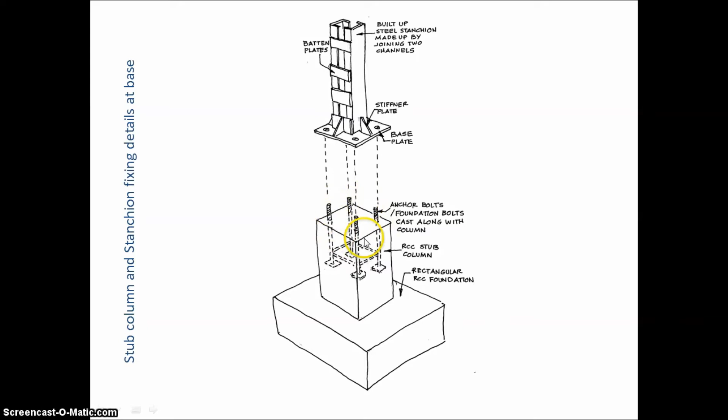Now once this is done, the steel column is fabricated or manufactured outside. This stub column and foundation has already been cast. The steel column which has been fabricated outside is lifted up with the help of a crane, and then it is slowly lowered down onto the pedestal in such a way that the holes exactly correspond to the foundation bolts in the stub column. So you will see that the bolts go through these holes and the steel column gets fixed on to the stub column.

Let us go to the next slide and see a position where the steel column has now been fixed to this stub column. What you are seeing here is the RCC stub column. You are seeing the anchor bolts with the small plate at the bottom. You are also seeing the base plate of the steel stanchion and the stiffener plates. The bolts have gone through the base plate, and the steel column is now fixed onto the pedestal.

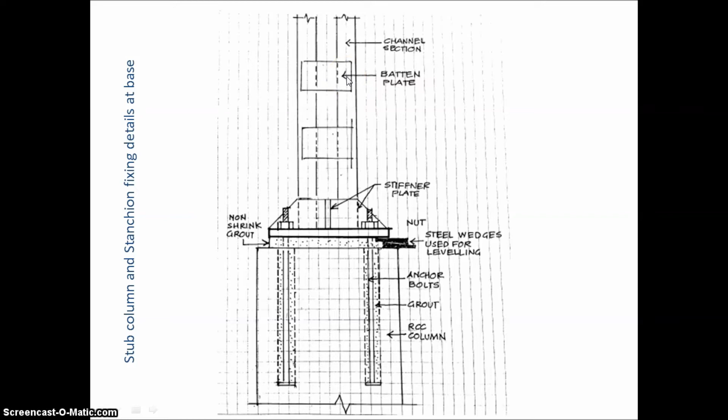Now, one important thing that you should note is that while fixing this steel column to the pedestal, a gap is left or maintained between the top of the stub column and the base of the steel column. The reason for this is that we need to adjust the vertical level of the steel column, and therefore some gap is required. So once this column is placed in position, its verticality is checked with the help of a plumb bob. You are possibly aware that the plumb bob is used for checking verticality.

Once it is brought into perfect plumb, that is, perfect vertical level, the gap between the top of the stub column and the base plate is filled with a cement grout. But this grout is slightly different from standard grout, and it is called a non-shrink grout. The reason is that if we use a standard cement grout, after the cement sets it will have a tendency to shrink, and if it shrinks, a gap will again be created in this space. So the non-shrink grout ensures that this is completely filled up and there is no shrinkage.

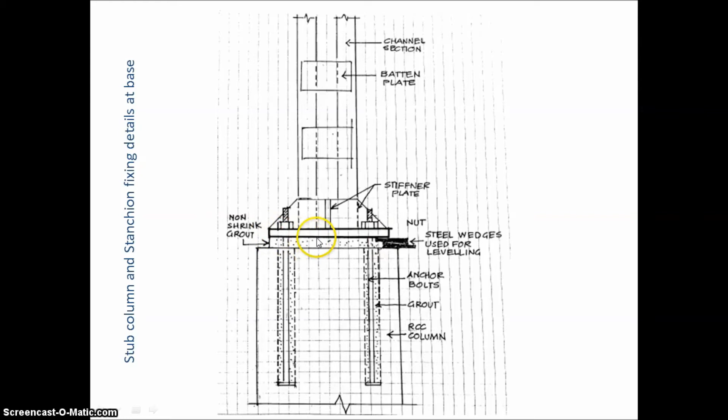Now let us again see this in the form of some other three-dimensional sketches. As you can see here, this is the foundation for the RCC column. This is the PCC at the base, and you are seeing this as the column footing. You can see the stub column here. You can see the foundation bolts.

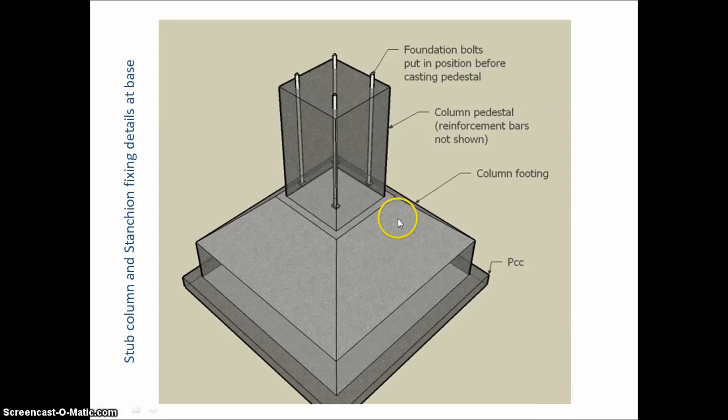Now purposefully we have not shown the reinforcement inside the column because we want to explain how the foundation bolts are put, but there is going to be reinforcement inside the column. You are seeing here that this is a trapezoidal footing. In earlier case we had seen that this was a rectangular footing, but it doesn't matter. It could be trapezoidal or rectangular footing.

So once this is completed, this photograph is showing you how the stub column is going to look like. You are seeing that the foundation bolts are jutting out of the column and ready for the steel column to be fixed on top of them. You can also see that there is some steel reinforcement which is coming out here. This is for joining the plinth beam which is going to come from the side.

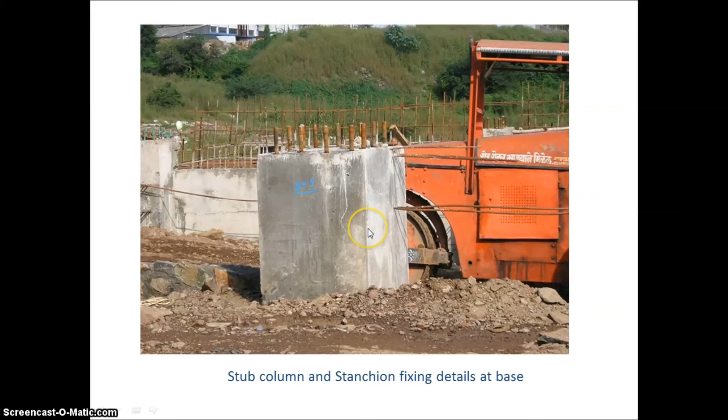In the next photograph you can see how this would look like in actual reality. You will see that this is the stub column. You will see there are some small nuts here also at the bottom called as check nuts, which will maintain this gap between base plate and top of stub column. And you can see that now the steel stanchion has been placed in position.

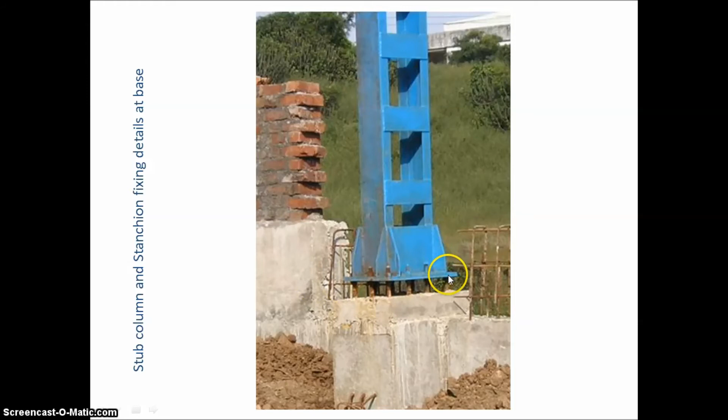The next step would be that we will be leveling the steel stanchion. So by using the check nuts and by moving this column slightly, we will bring it in exact plumb, that is vertical position. Once that is done, then we can fix the nuts on top of these bolts and we can fix it finally to the stub column.

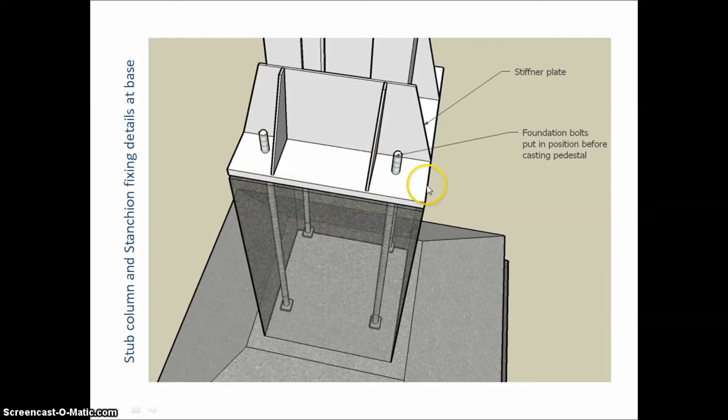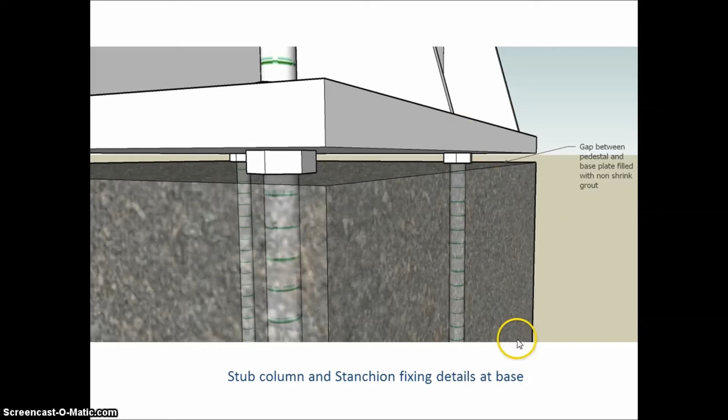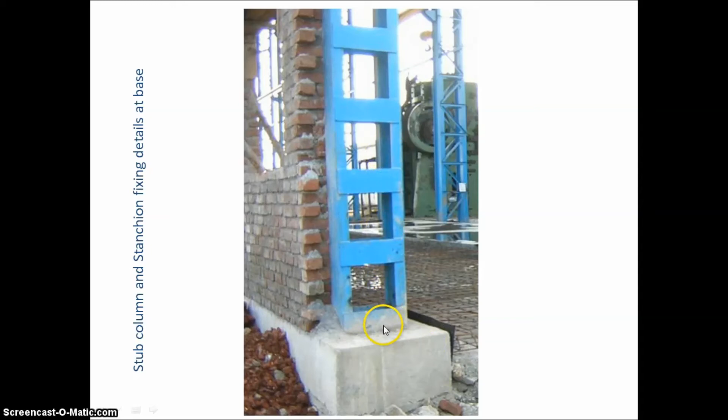So you will see that in this case you are now seeing the gap that is left between the base plate and the top of the stub column. After the verticality has been checked and the final level is achieved, the gap is filled with the help of a non-shrink grout to complete the connection between the steel column and the RCC pedestal. So this is how it is going to look like once it is completed and it has been fixed in position. So that was all regarding the method of fixing stub column and stanchion fixing details.

Now here is a short note on the same topic. The main salient points of the short note have been given. So let us just go through these points one by one. A steel column is called a stanchion. The foundation for steel column is a RCC foundation for obvious reasons, because as I explained, if we give a steel foundation, then there is a possibility that it will get corroded because of moisture within the ground.

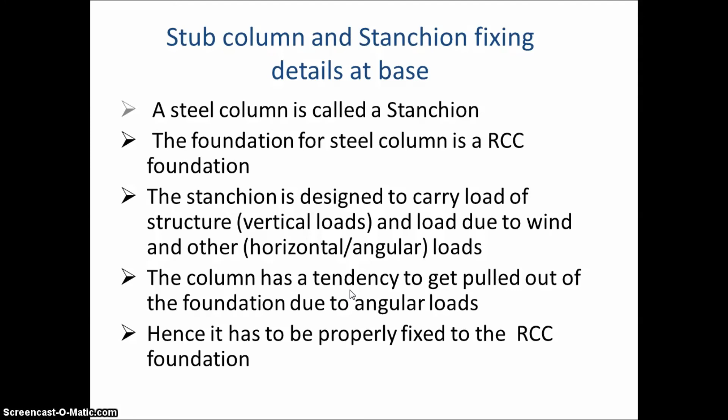The stanchion is designed to carry loads of structure, that is vertical loads, and loads due to wind and other horizontal or angular loads. The column has a tendency to get pulled out of the foundation due to angular loads. Hence, it has to be properly fixed to the RCC foundation. Vertical part of the RCC foundation is the stub column or the short column. Foundation bolts are cast in the stub column during construction.

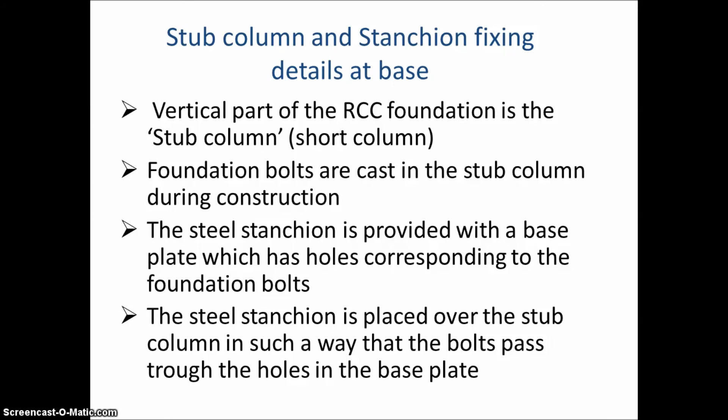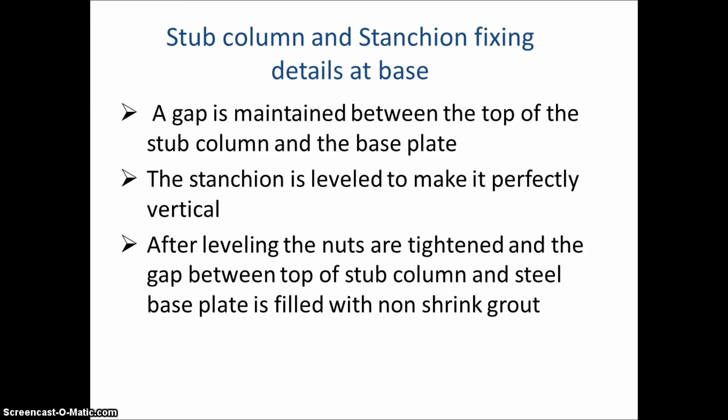The steel stanchion is provided with a base plate which has holes corresponding to the foundation bolts. The steel stanchion is placed over the stub column in such a way that the bolts pass through the holes in the base plate. A gap is maintained between the top of the stub column and the base plate. The stanchion is leveled to make it perfectly vertical. After leveling, the nuts are tightened and the gap between top of stub column and steel base plate is filled with non-shrink grout. So that brings us to the end of this presentation.